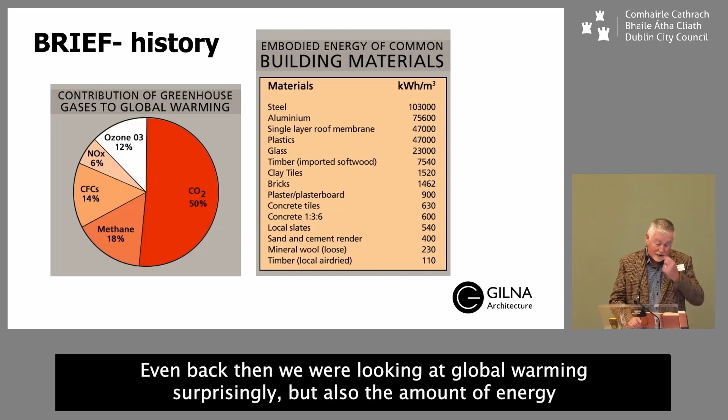So cast your mind back to 30 years ago, and Temple Bar was being rebuilt. And of course, the reason is, why did we do it? Even back then, we were looking at global warming, surprisingly, but also the amount of energy that buildings take to build, and also the amount of energy that the buildings use during their use.

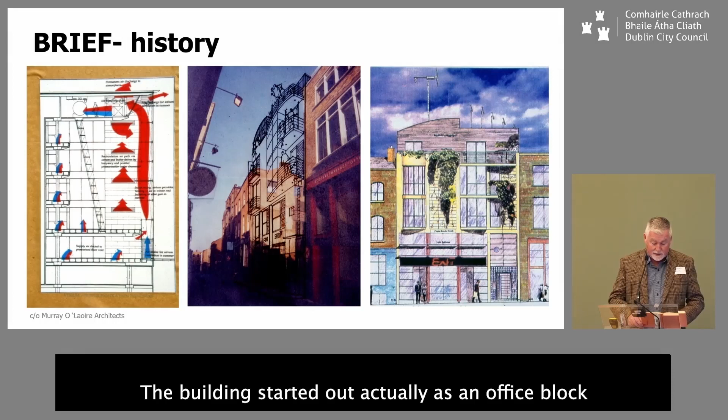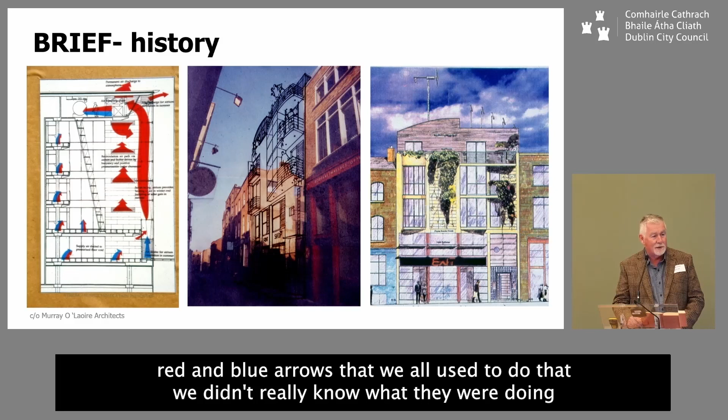The building started out actually as an office block in the Docklands. So on the left there is your classic architect's red and blue arrows that we all used to do, that we didn't really know what they were doing, but they look good on the drawings. And a few photo montages by myself. Photoshop didn't exist back then. It was spray mount and photocopiers.

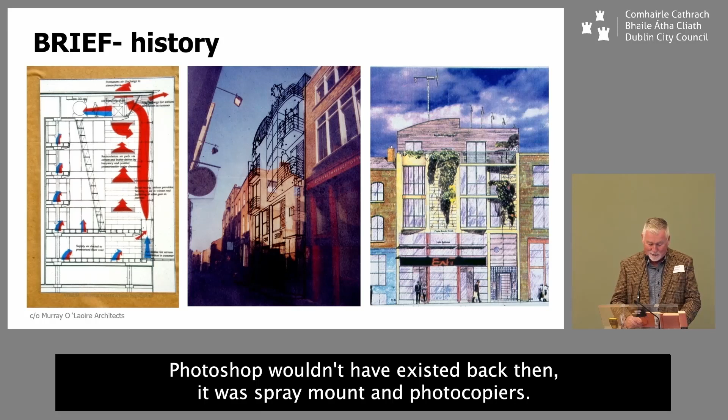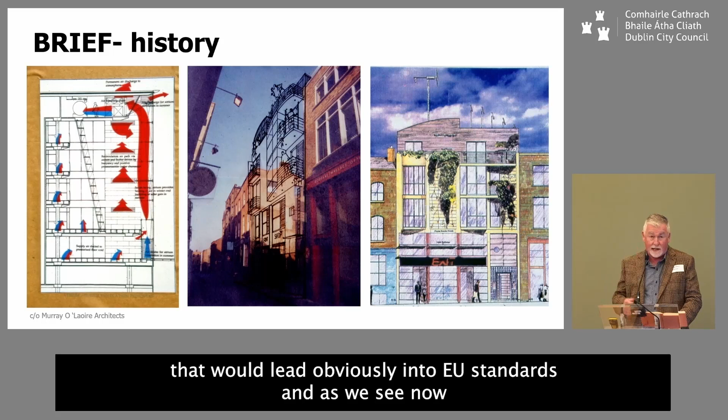So basically the EU were promoting energy efficiency in test cases all around Europe that would lead, obviously, into EU standards and, as we see now, into Part L in our building regulations.

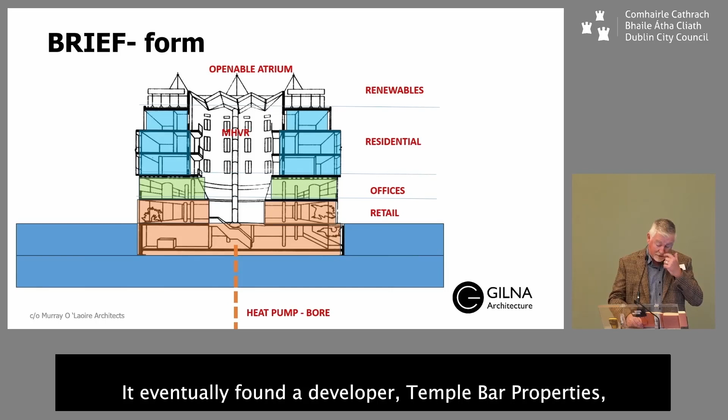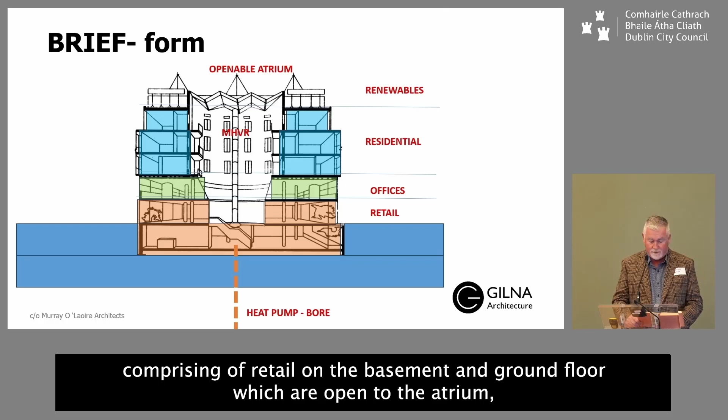It eventually found a developer, Temple Bar Properties, but it changed from an office to a mixed-use building, a city centre one. So you'll see there the building section itself comprising of retail on the basement and ground floor, which are open to the atrium, offices on the first floor, and residential on the top 3 floors.

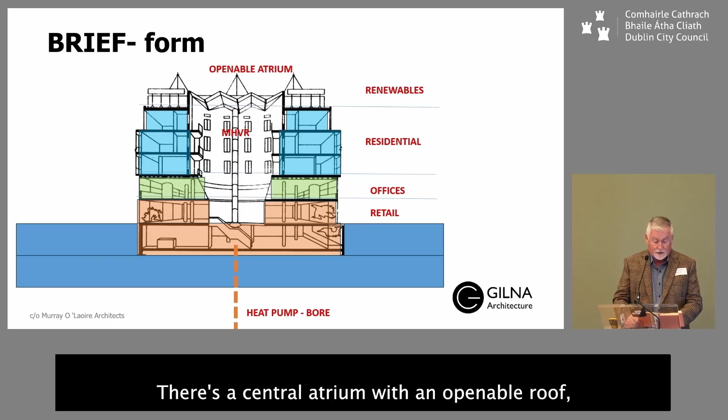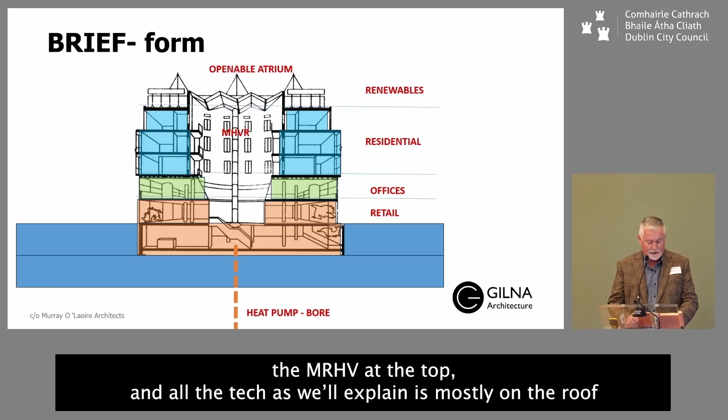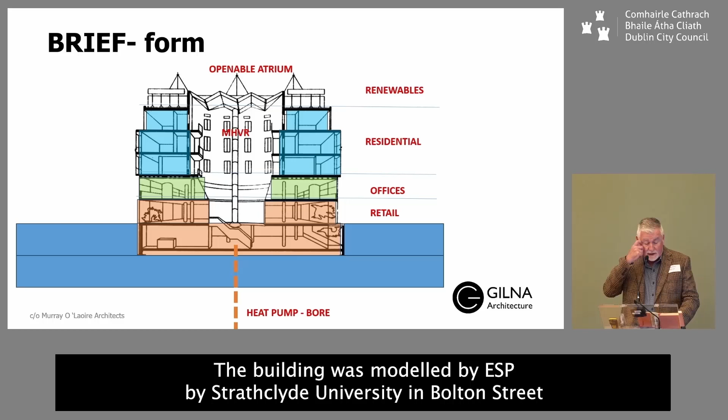There's a central atrium with an openable roof, a mechanical heat recovery ventilation unit, as we all know, the MHVR, at the top, and all the tech, as we'll explain, is mostly on the roof with a heat pump bore into the earth. I'll go back on that later. The building was modelled by ESP by Strathclyde University in Bolton Street. There were no Zoom meetings back in those days, so we had to haul it over to see the results.

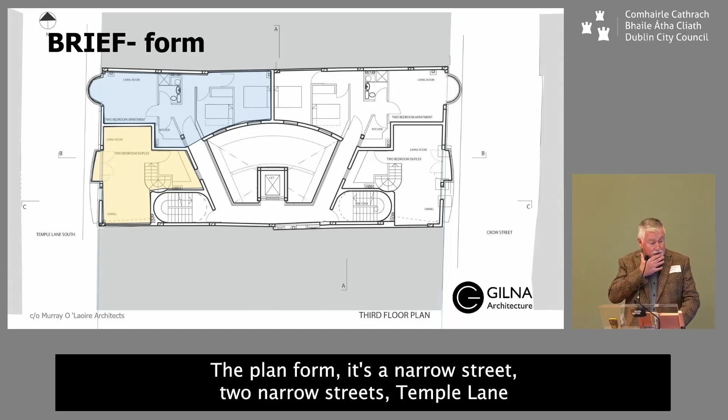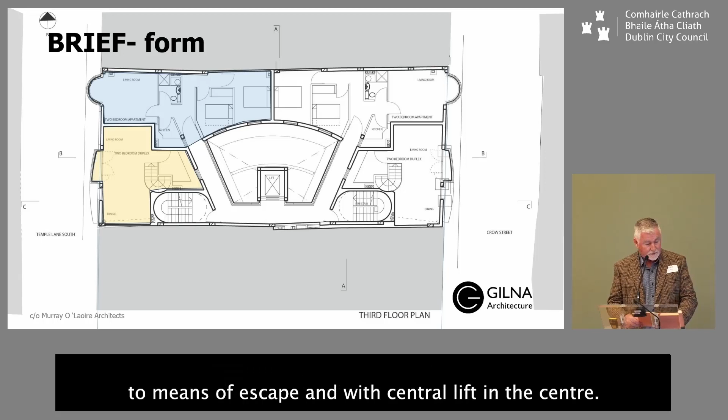The plan form, it's a narrow street, 2 narrow streets, Temple Lane South and Crow Street down the road from us. And it's centred again by the atrium. It's 26 metres long by 11, so it's a tight site. The atrium is classified as an open space because the roof opens up. 2 means of escape, and with central lift in the centre. The void, or the atrium in the middle, is curved that way to follow the sun path. South is down the map.

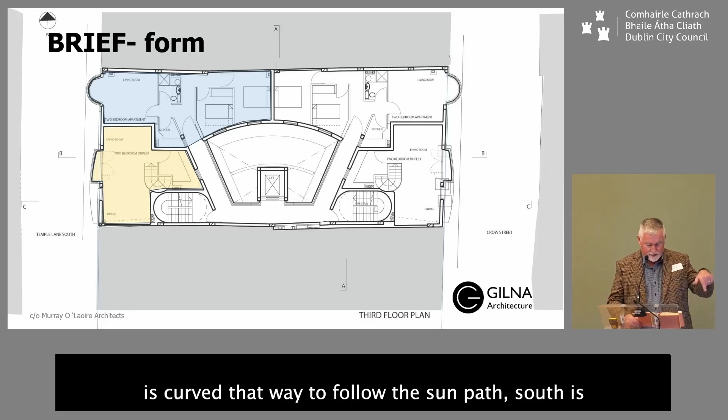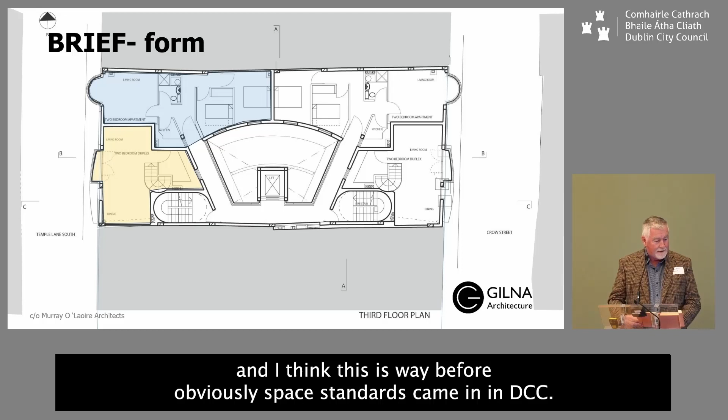There's 8 apartments, which are tiny by today's standards. Now, we were up against the likes of Zoe Developments back in those days, and I think this is way before, obviously, space standards came in DCC. But I think the brief to us then was that they couldn't be seen to be exclusive.

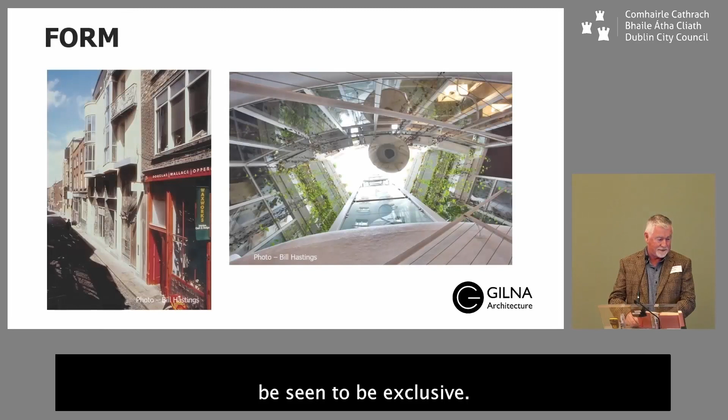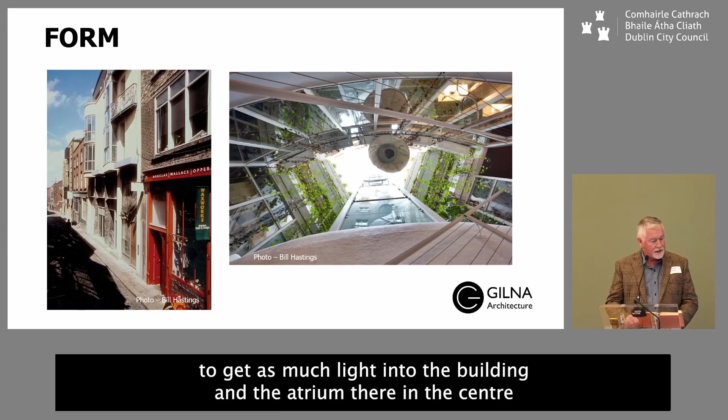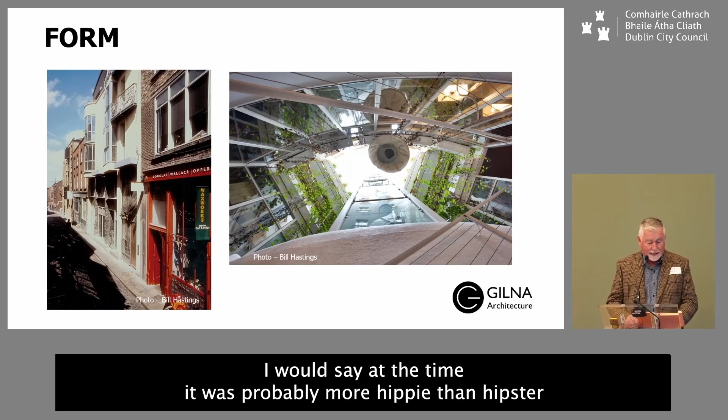So the form. As you can see on the outside, we tried to use as much of bay windows and balconies in order to get as much light into the building. And the atrium there in the centre is full of regenerating, oxygenating plants. I would say at the time it was probably more hippie than hipster through its use. But as I said, it was a test case.

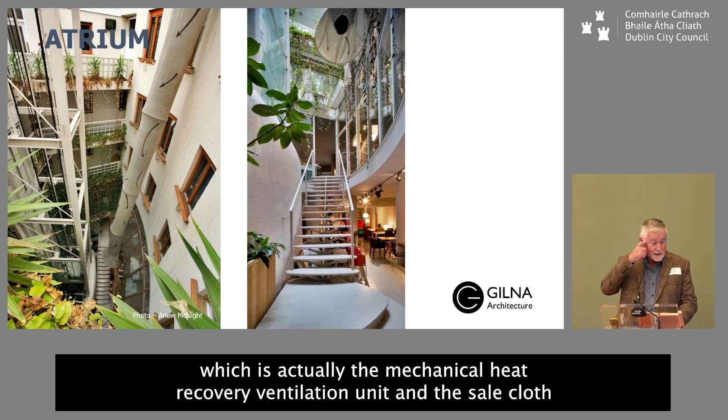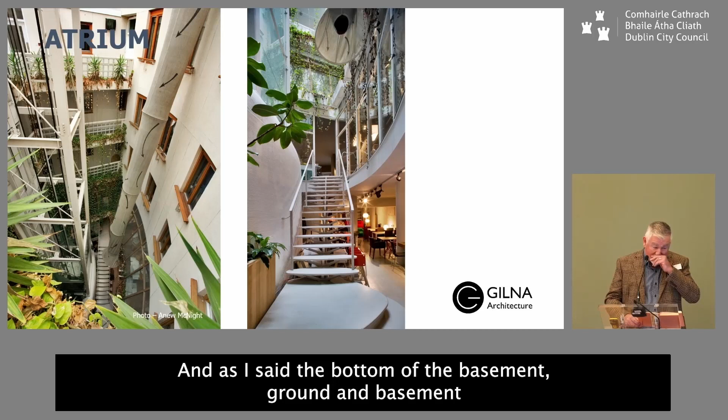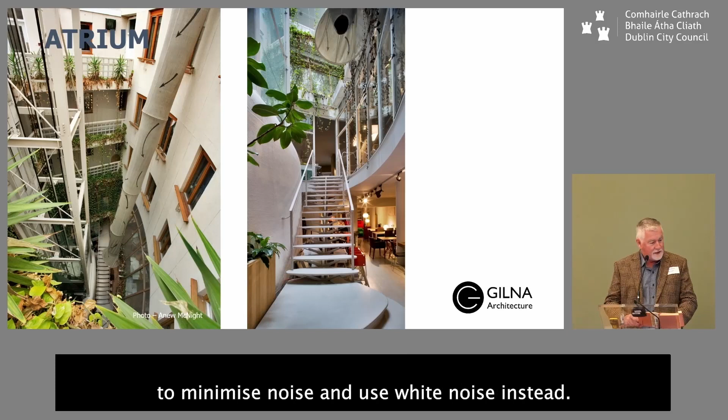Atrium there is at the centre with, you'll see that sock there, which is actually the mechanical heat recovery ventilation unit. And the sailcloth there was used by the artist Vivienne Roche to oxygenate the area. As I said, the ground and basement were retail. And because it's open to it, we were concerned about noise. So there was, at one time, a water feature there to minimise noise and use white noise instead.

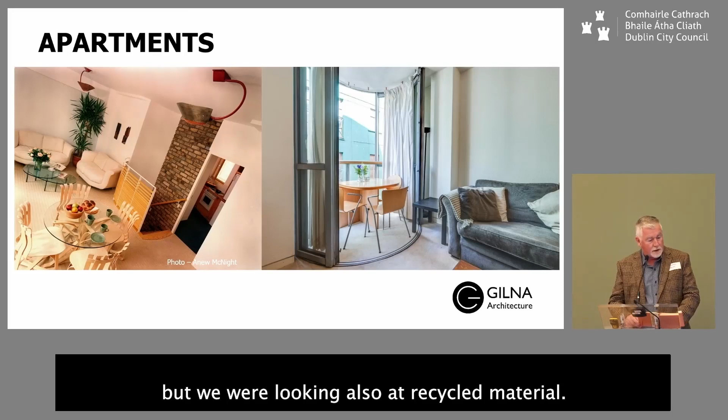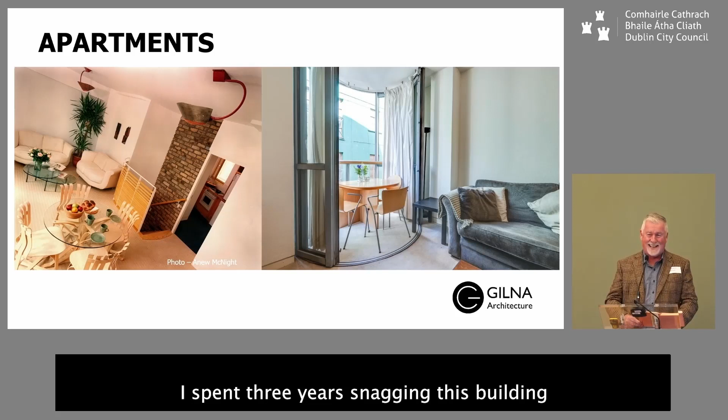The apartments, as I said, are small, but we were looking also at recycled material. So you'll see brick. All the kitchens had to have windows, which is pretty unique back in those days. And because they're so small, 4 of the apartments have these bay windows that turn into balconies. They're from a French company, and they leaked like mad. I spent 3 years snagging this building, so we never used them again.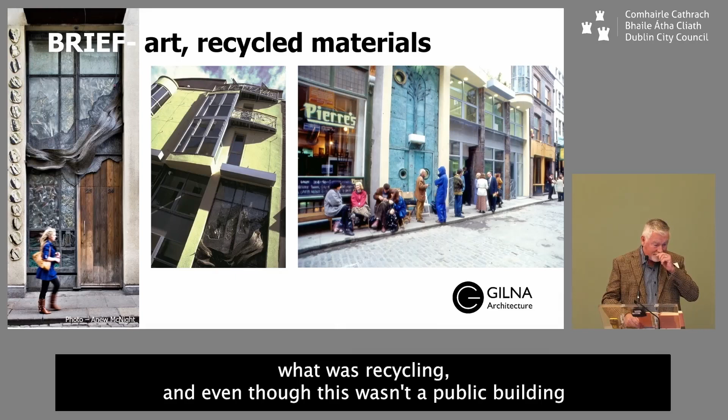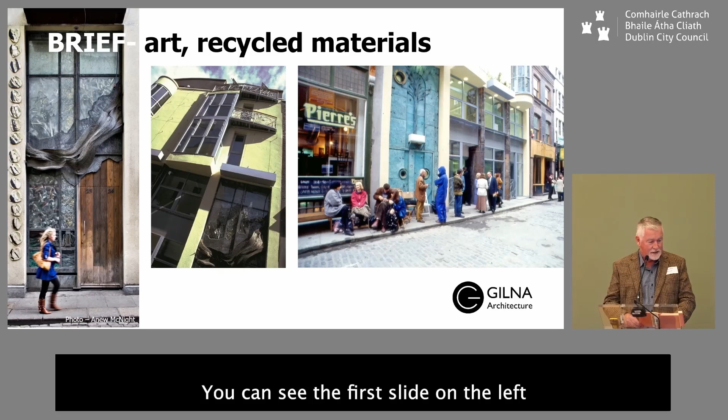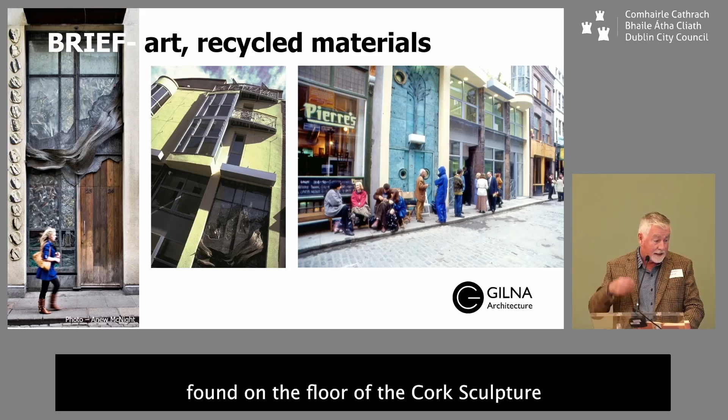Part of the brief, obviously, was recycling, and even though this wasn't a public building, we were keen to put as much art into the building, so it's integrated into it rather than applied. You'll see the first slide on the left is a door by Maud Cotter, and I think it's called Mellifluous Jellies, and it's made from recycled material found on the floor of the Cork Sculpture Factory, sandwiched between two buildings, or

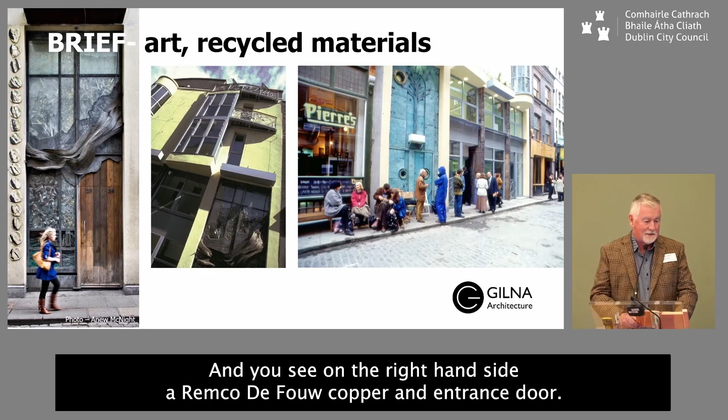two panes of glass. There was a nod to recycling, literally, with recycled bicycles on the balconies, which rusted like hell. And you'll see on the right-hand side a Remco de Fouw copper entrance door. In fact, that was taken at the launch of the building when people were actually queuing up to buy the building. So nothing really has changed in 30 years.

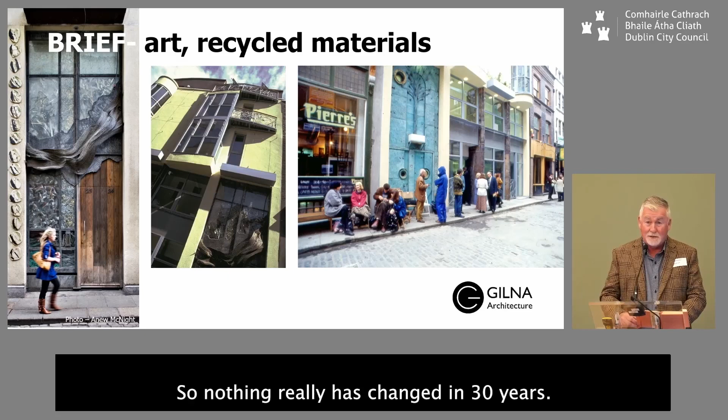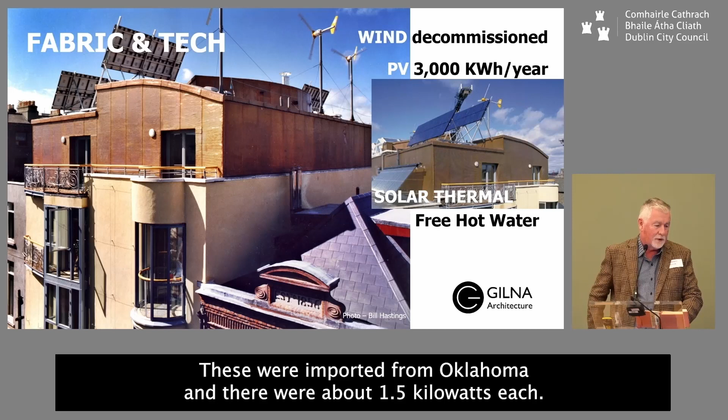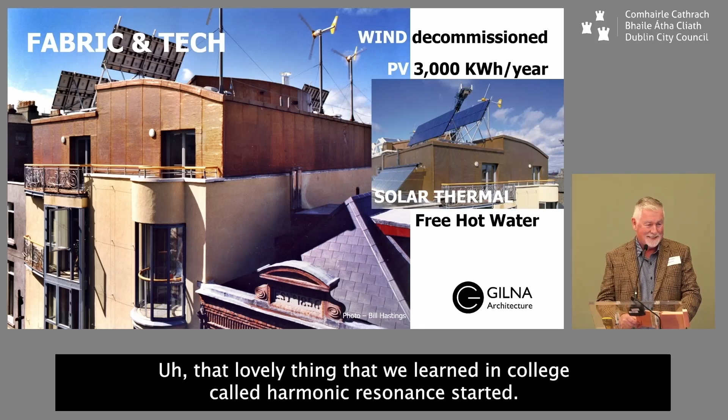The tech. Most of the tech is actually on the roof. And again, this was probably the first time I think wind generators were actually used on the building. These were imported from Oklahoma, and they were about 1.5 kilowatts each. They were decommissioned because they didn't work. That lovely thing that we learned in college called harmonic resonance started. So the building would actually shake when these three windmills started going.

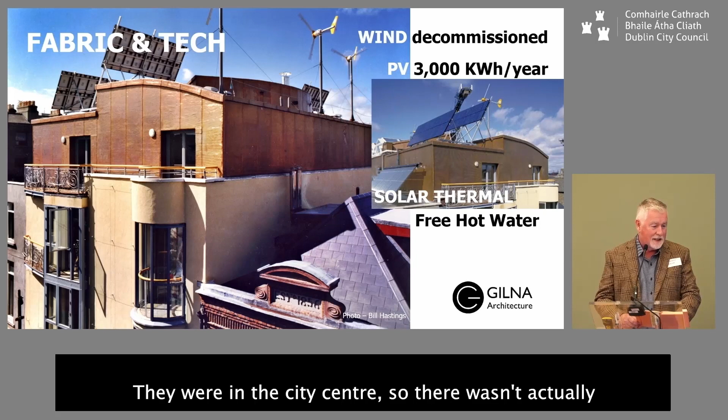They also got disturbed because they didn't know which way it was. They're in the city centre, so there wasn't actually a good path of air to go across them. So they were decommissioned. But look, it's a test case. They don't work. Don't use them again.

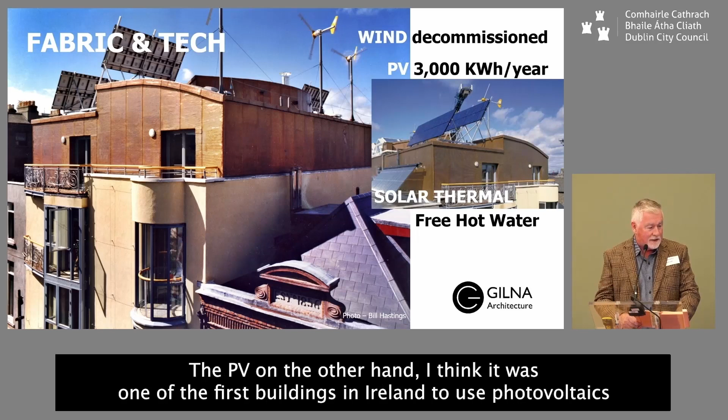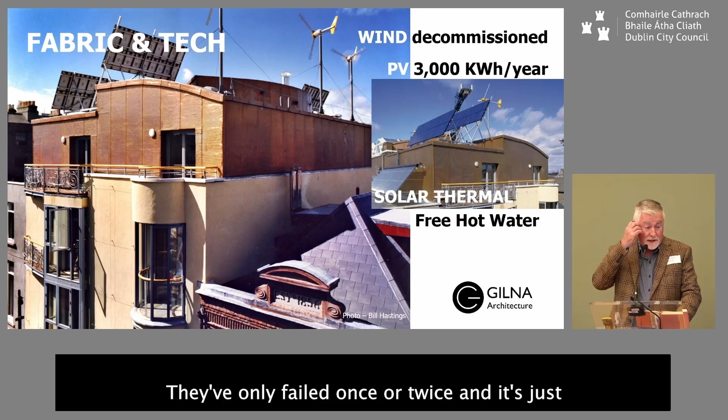The PV, on the other hand, I think it was one of the first buildings in Ireland to use photovoltaics. It was very extreme in that. They generate about 3,000 kilowatt hours per year and are still going. They've only failed once or twice, and it's just through a storm. Solar thermal, you'll see on the second slide there, is the evacuated tubes, which are kind of old hat now, but they provide the free water.

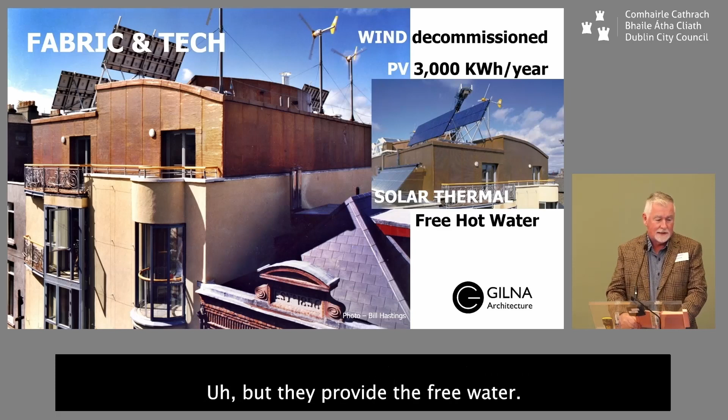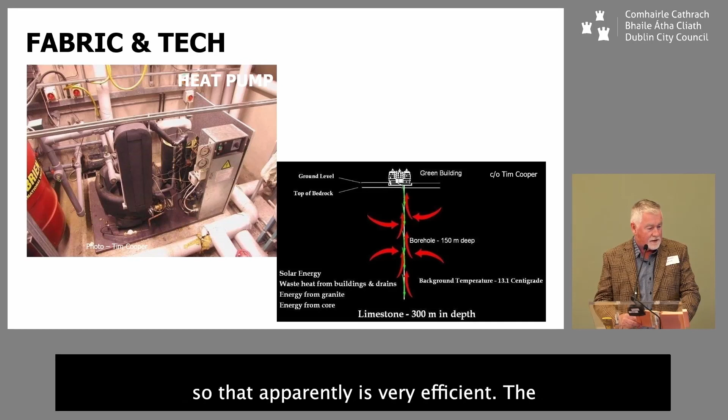Now, this is a heat pump. Don't get excited about it, but this is what you can see. So this is actually a heat pump which has a heat bore down 150 meters into the Earth's surface. Just for comparison's sake, the spire is 120 meters. So that apparently is very efficient. The efficiency ratio is about 4.5 to 5, which means for every kilowatt you put into it, you get 4.5 or 5 kilowatts back in heat.

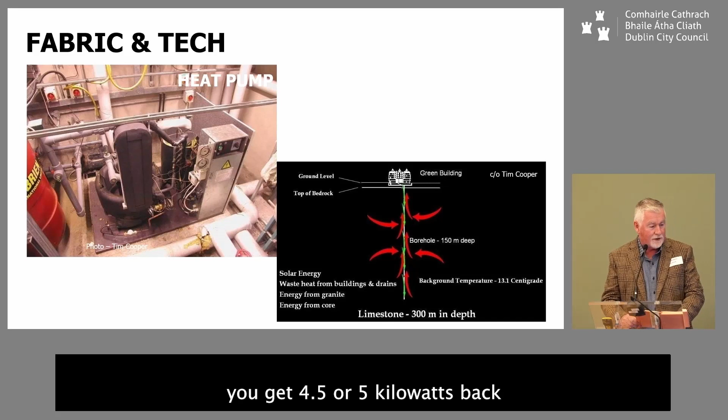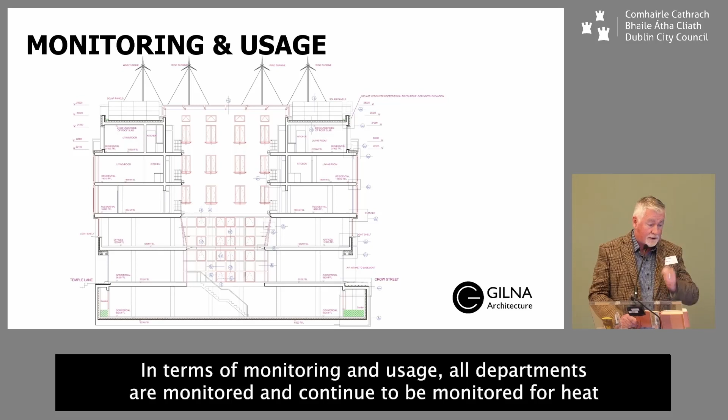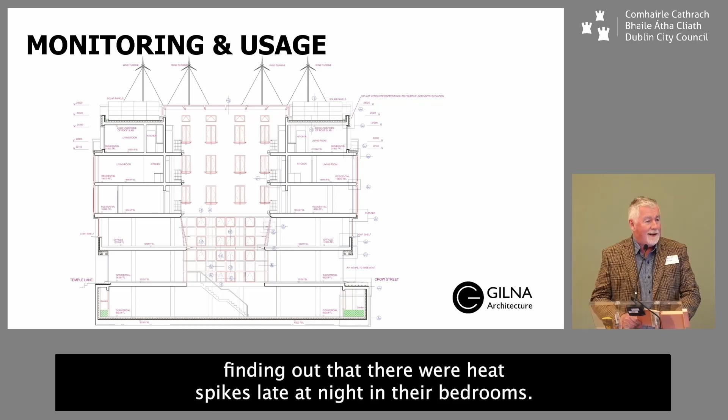In terms of monitoring and usage, all the apartments are monitored and continue to be monitored for heat, which led to some concern from some occupants finding out that there were heat spikes late at night in their bedrooms. So we could find out exactly what people were doing. It uses 80% less energy than a normal building at the time.

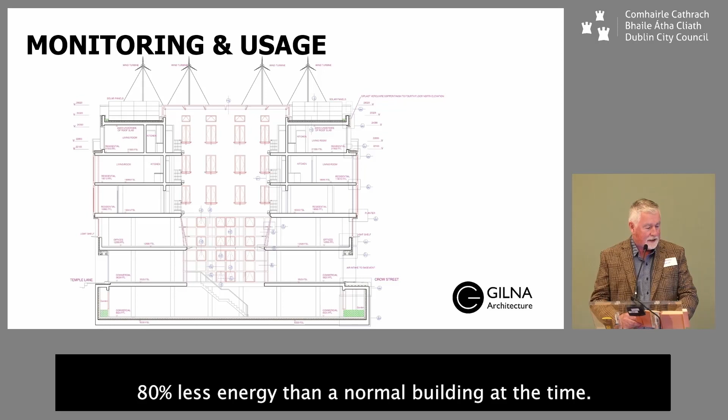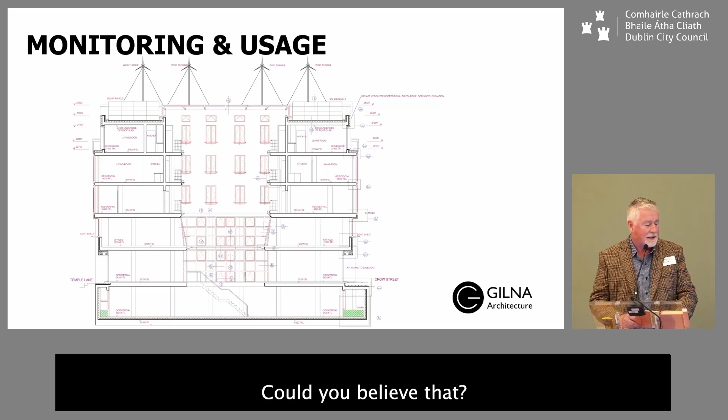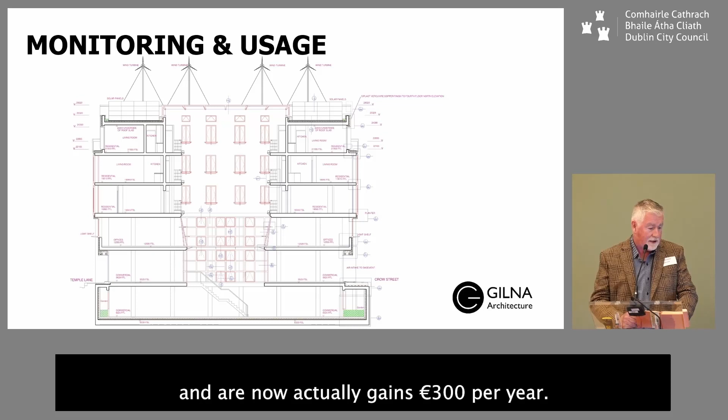I think about 15 years after the PV was put in, it used to go down into batteries in the basement, which apparently were lead acid. Could you believe that? Because I don't think lithium was invented back in those days. They were coming to the end of their life, so it was the first building to be switched back into a grid system, and it now actually gains €300 per year. So energy and heating apparently are nearly free for the usage.

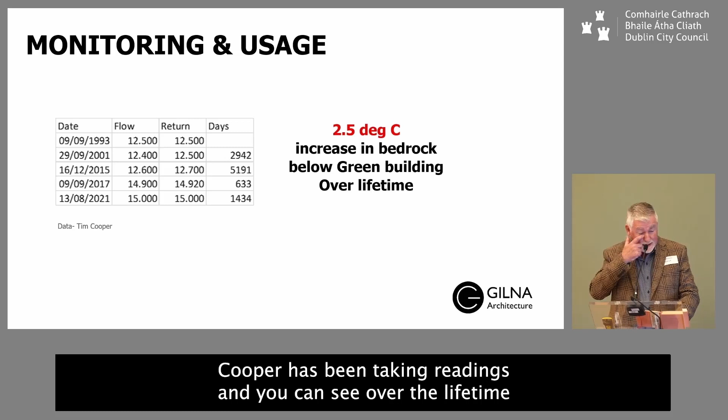I suppose one of the shocking things that's come out of it is what's happening underneath the building. So from 1993 to 2021, Tim Cooper has been taking readings, and you can see over the lifetime, the bedrock temperature has increased by 2.5 degrees, which is kind of shocking up the road.

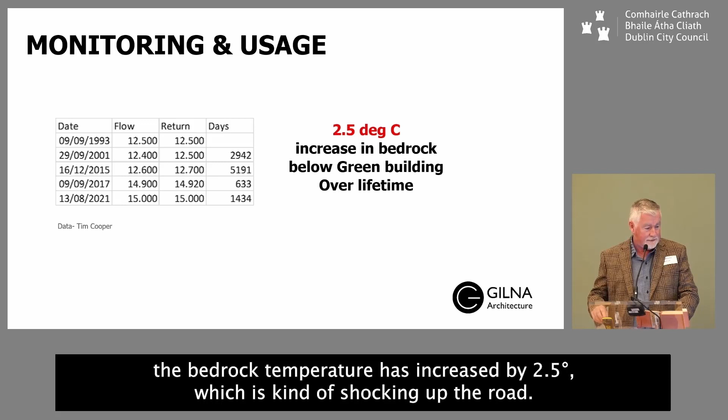So there is a small clip here. My thanks to Niall Martin in RTE and Nationwide. I've clipped it to 50 seconds for copyright reasons, and you might recognize somebody in the middle of it.

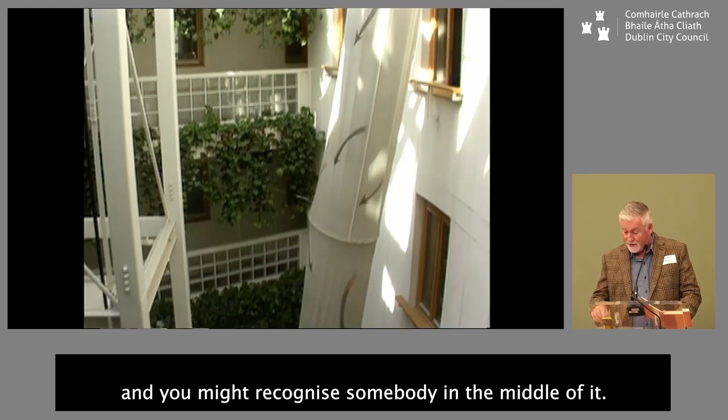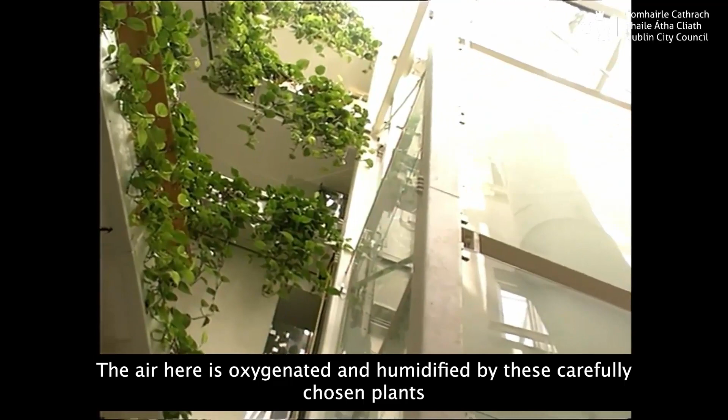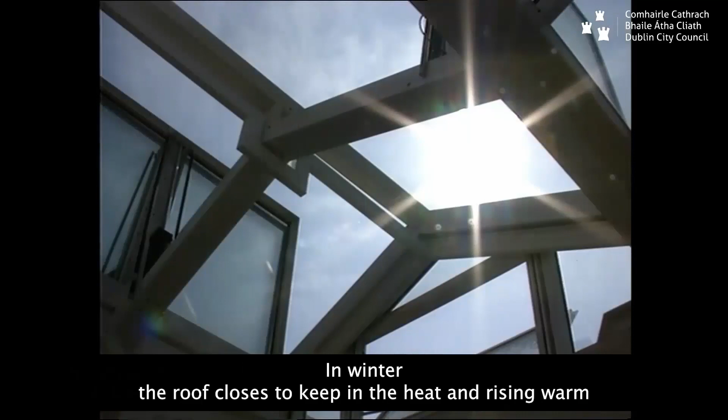All the bedrooms open onto this quiet, bright and airy atrium at the heart of the building. The air here is oxygenated and humidified by these carefully chosen plants. In summer, warm air is released through a glass roof that opens automatically. In winter, the roof closes to keep in the heat, and rising warm air is blown through a sock back down to ground level for recirculation.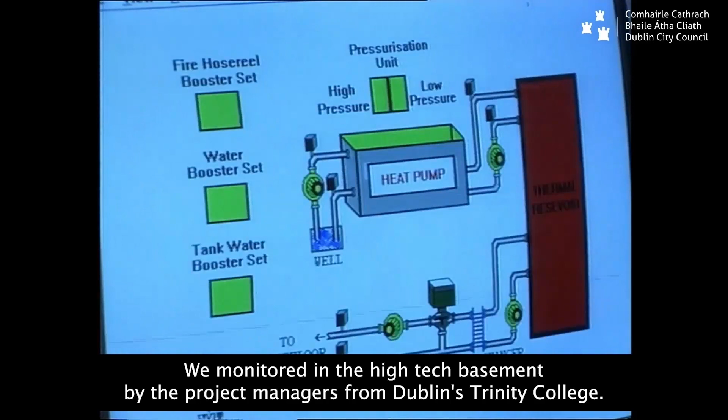So therefore, we looked at minimising the amount of steel in the building, minimising the amount of energy inefficient material that we could. Most of the finishes you see here are natural finishes. We tried to go away from solvent-based paints. We monitored in the high-tech basement by the project managers from Dublin's Trinity College. And on the screen now we're getting real-time temperatures from the well where we're extracting bedrock energy, using the heat pump and transferring it into the building.

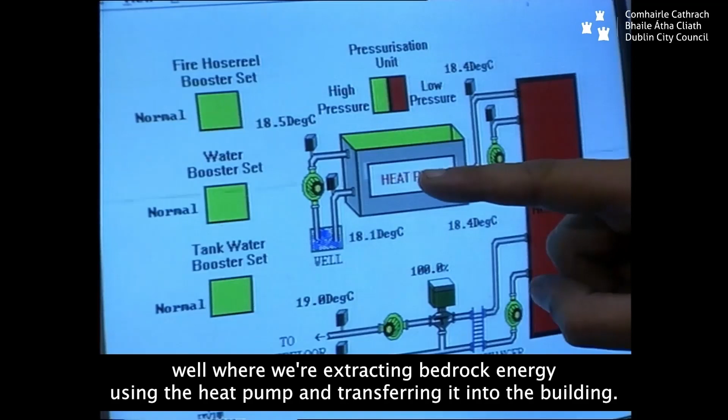So would the average resident in this building save on their energy bills every year, percentage-wise? We would expect them to save of the order of 80% compared to a conventional electrically heated apartment.